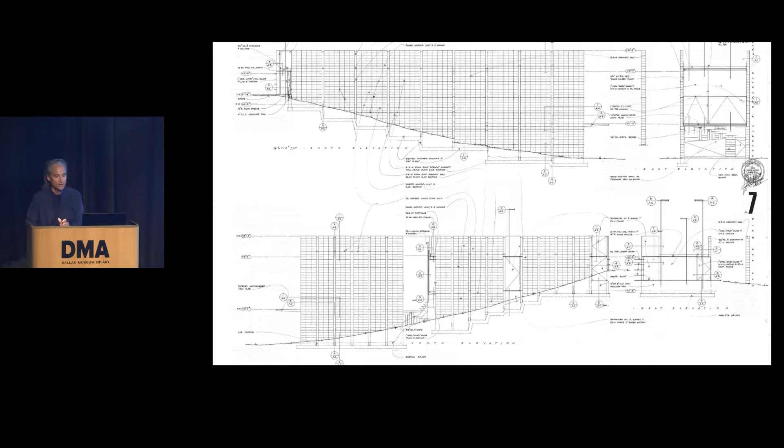I was the owner builder. I topped out the last wall with the grout pump and the hose in my hand. These are three generations of masons, the Hotstetlers, who had a side firm called Midnight Masonry. We did this nights and weekends with friends.

It was how I started my practice. It was my business card coming out of this hillside. It was on the cover of Architectural Record, was a Record House and Review, and featured in many other publications.

All the formwork for the house was recycled into the interior partitions. The block is as cast out of the mold, so it's reflective in oblique light, and it changes with the different times of day—sometimes it's silver, sometimes yellow in the morning, red in the evening. But it sits on the street. There's a street porch, and you drive into the house.

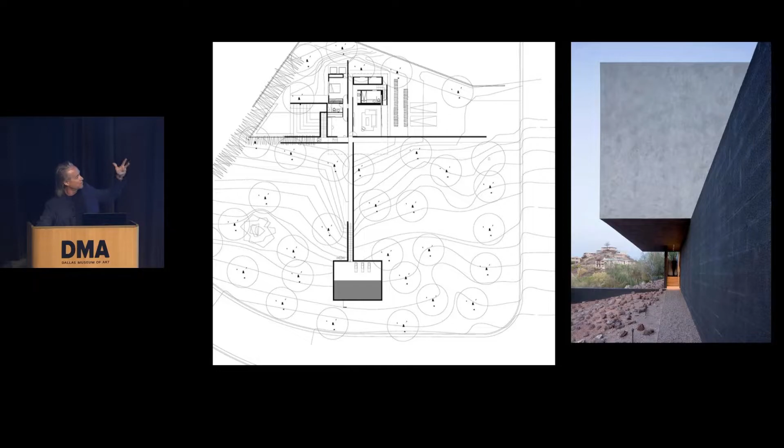You were just above the city skyline, so it almost looked like a real city skyline, kind of stacking up. The section was all about looking across the house, the house across the street, a pinwheel plan, masonry laterally supporting this floating volume, which is plastered with a finish that would change with different qualities of light—like the desert patina or desert varnish on rocks that would be black, brown, purple, silver in oblique light.

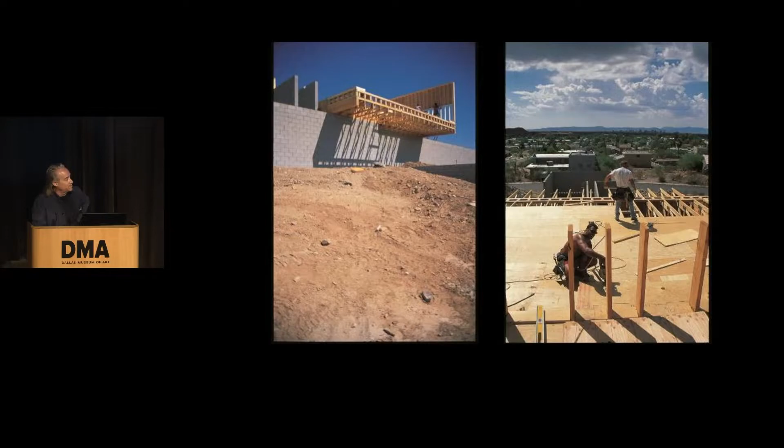First project on a very low budget—gang nail trusses, wood frame, stucco. But there was this big idea, this dialogue between the warmness of the interior of the living volume and a cool volume that was out here.

It's a tome, a 10-pound book, it comes with like a luggage rack carrier thing. Anyway, it's like 6 selected projects, but it's called Dialogues in Space, and it's really how I think about a site and a building—it's a method of how I work. So a lot of times the epiphanies in our studio are through dialogue.

I certainly sketch and all of that, but a lot of times it's about sitting around a table and talking about the intentions of a project. It's also a dialogue with the constructors, with the client, and it's about listening. It's a kind of methodology of how we work.

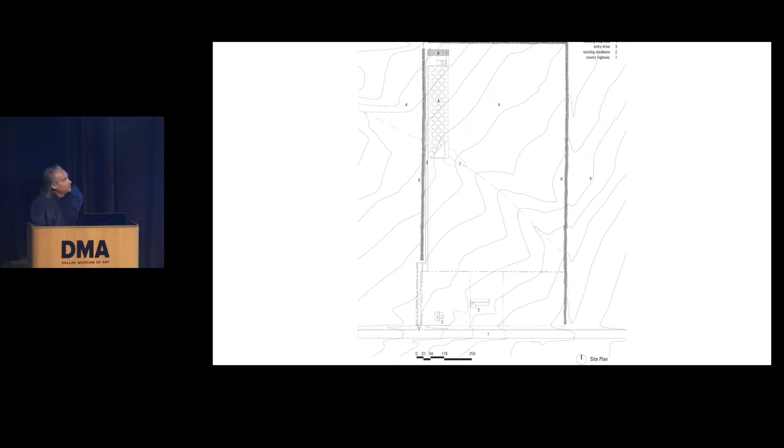We're against the hedgerows that protect us from the northeast winter winds. An apple orchard, which is kind of in memory of one of the last things my client did with his father.

Nothing fancy, and then clad in galvalume. It's actually reverse masonry veneer inside and concrete slabs to absorb the winter sun. But I love this kind of warm light of the home in this kind of glacial blue.

So back to the desert. We're way up here at the edge of our desert, edge of Scottsdale, desert courtyard house. These rocks were here, they had like fallen from space or something. They're the only volcanic rocks around. So we were like, okay, we're keeping those.

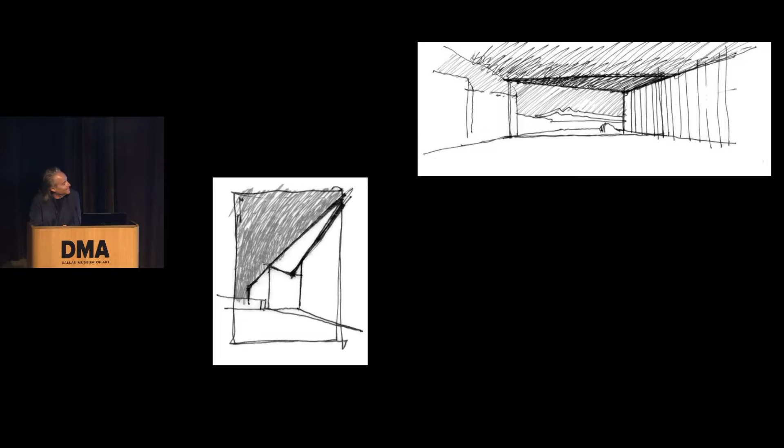Some early sketches by Tommy Suchart, who was just lecturing at UT Arlington. Tommy was the principal collaborator with me on this project. This is pretty much all he did when he was at my studio for like 6.5 years.

It was 10 years in construction. It was 2 years in design and construction documents. One reason is this long driveway. It was a site that was added late.

It's a peninsula surrounded on 3 sides by 2 major washes. And this is this roof, which is 5 by 10 Corten, that wraps down in places the courtyard in the middle to reduce the mass of the house from above.

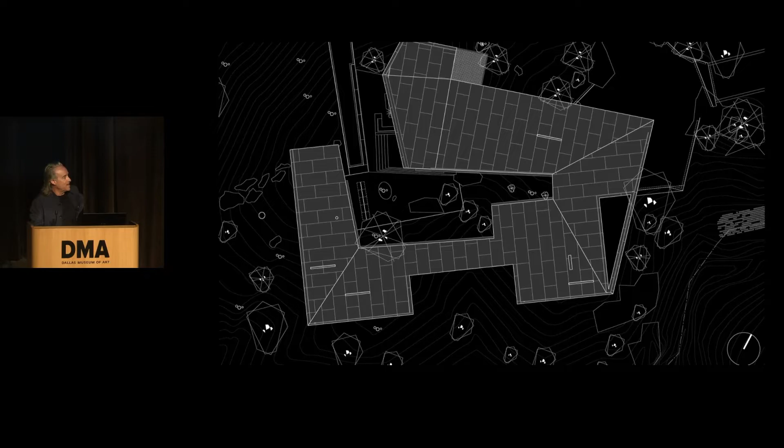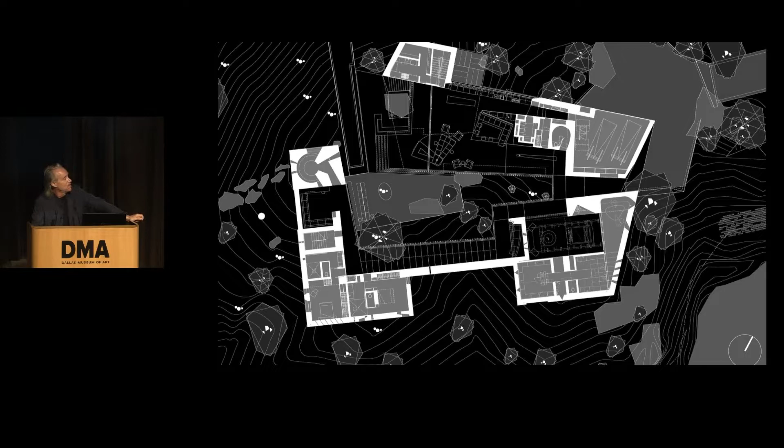This is the plan. It's a kind of engawa plan, so it's a loose collection of rooms around this, in this case, a glazed veranda, and then certain volumes that are in the base of the house section.

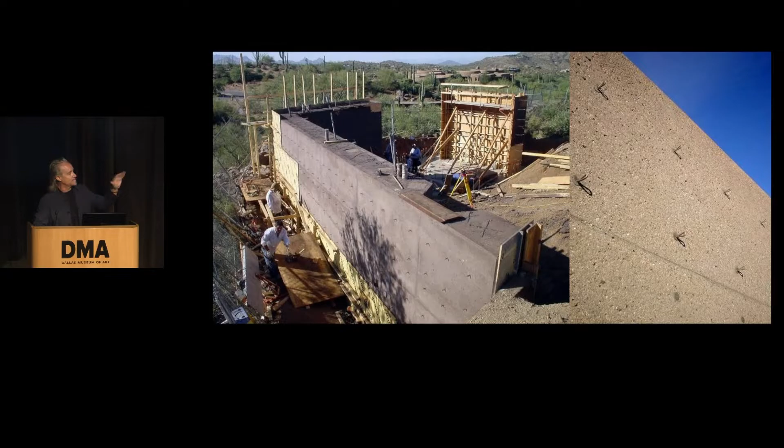The base of the house is a concrete plinth that is battered 3.5 degrees and then blasted, and it's the same concrete as this. So it's the same concrete slab that we're working differently.

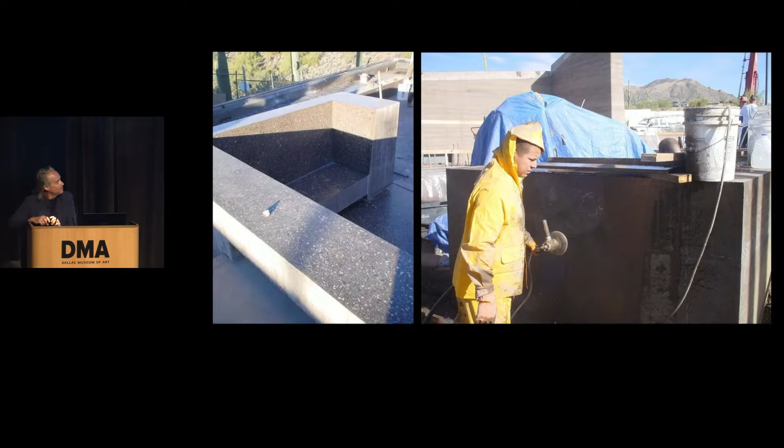So on the outsides, we're sandblasting. Everywhere else, we're grinding it with terrazzo grinders, large grinders and small handheld grinders. This is the fire pit, and then sometimes we're actually carving into the stair with a giant concrete saw and then polishing.

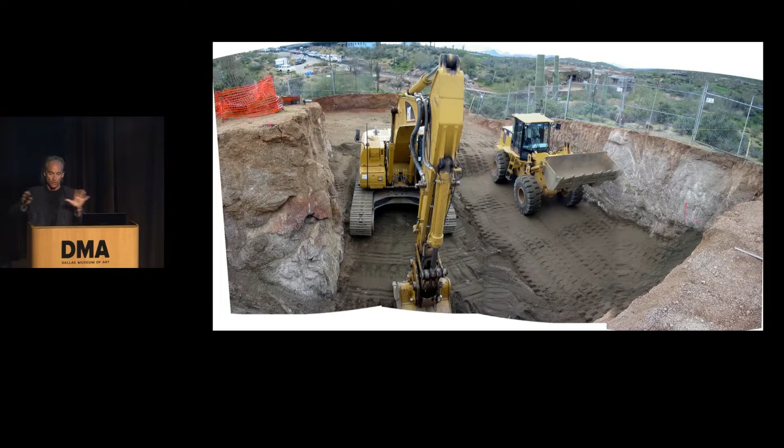And on top of that really good foot, which is necessary for rammed earth, is all of the excavation. It was very good soil for rammed earth. Not all soil is - we tested it, it was perfect. And we got really fantastic rammed earth walls, but literally there was no import, no export of earth. It all went into the walls.

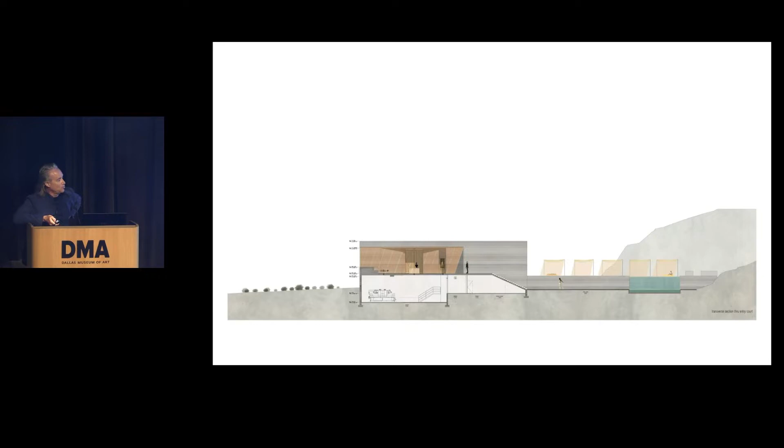So this is that 170-foot cliff. You walk up a stair. This is the artwork that is constantly changing at the top of the stair, the lobby.

This is a camera, so as you move, it's all outdoor circulation. You're never in an air-conditioned volume. You're walking to your room, going in between the privacy of your room, which is all about the quintessential desert experience, which is a solitary one. And yet we had to break those bars and hinge them, and that became a camera.

So as you're walking across here, you're panning the landscape. Kind of Western movies that were filmed here and other things are in the project.

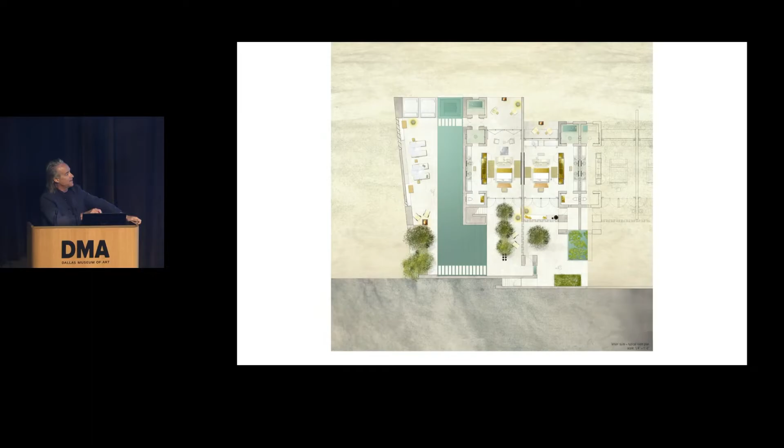The smell of water, the sound of dripping water, your number. We couldn't afford the gates into the courtyard, so they became woven horsehair from the Spanish tradition of doing that, a do-not-disturb rope.

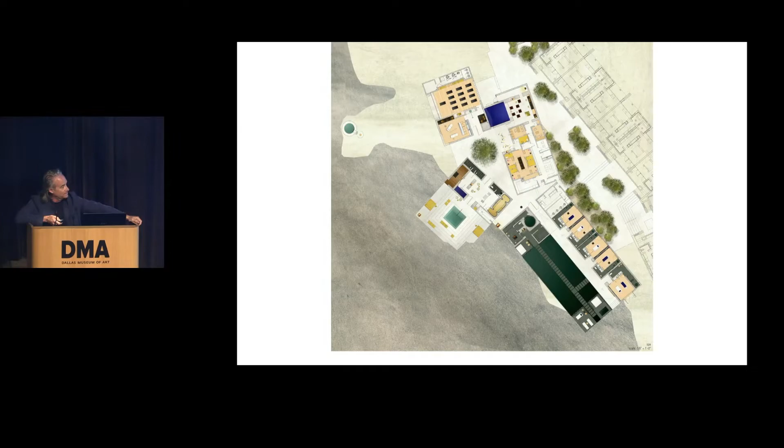And it was, the landscape—they're in the landscape, sheep herders all day, and their hogans were very introspective: family, fire, food, and a hole to the sky. So, anyway, these are the ways we were thinking about this project, and it kind of just completely recedes into the landscape.

And so we've done other resorts. I'm going to really breeze through these very quickly. This is with Marwan Al-Sayed. We sometimes collaborate. Marwan's doing a really fantastic project here in Dallas right now. It's under construction. I went to see it yesterday morning.

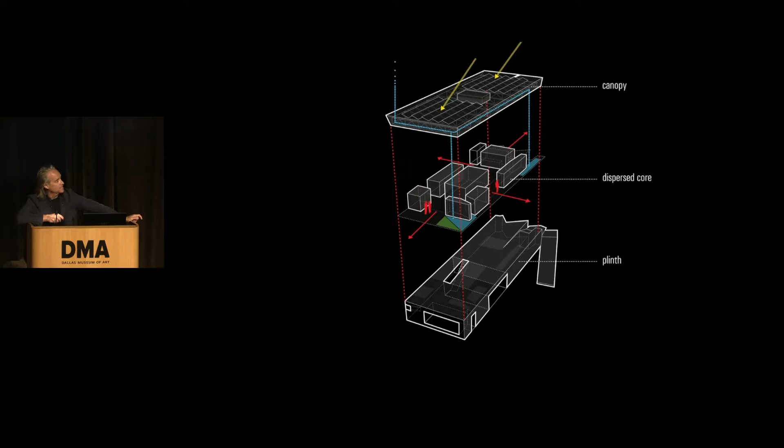and the plinth. And so this is that plan. All the doors open into those dispersed core volumes, so you can open up the entire house, and it's like living outside in fully shaded, fully programmed space.

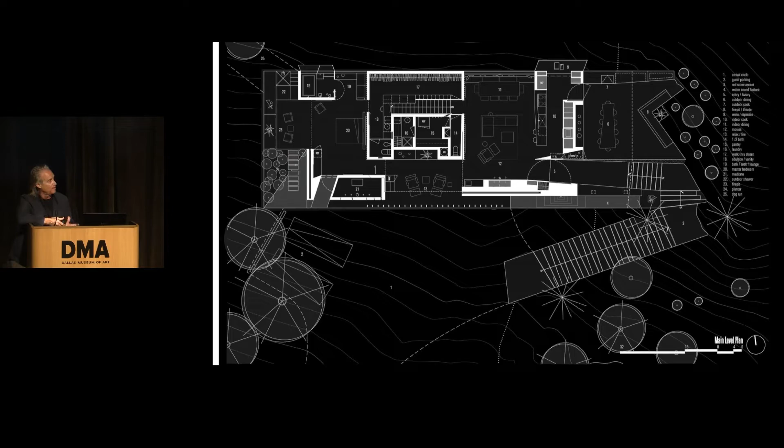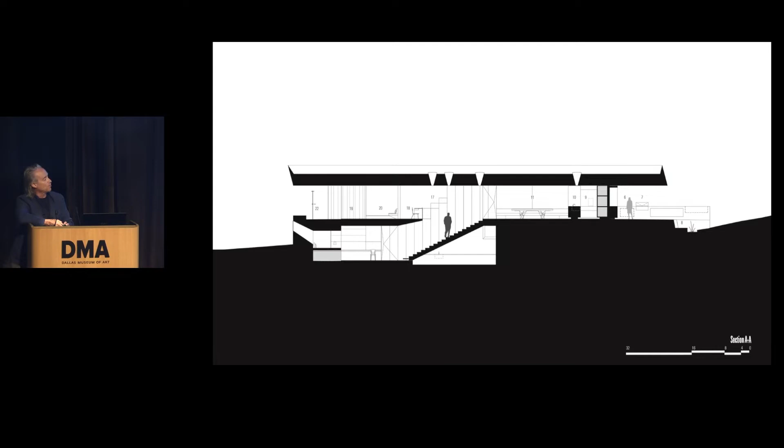It's 4,500 square feet, 2,000 square feet is outdoor space, fully programmed, 2,500 conditioned. So this is that house, the stair from the garage, and the 2 bedrooms that are kind of workout and a study.

Section the other way. Some details. It's actually masonry and concrete, some slab on grade, some concrete topping on metal deck, all clad in this kind of Verata plaster. It actually was, it's more monolithic than the concrete that we actually thought we could afford and found out we couldn't.

The entry, looking out from the entry. The roof canopy kind of splits as a kind of gift to the entry. There's an aviary. The first 30 minutes with this client programming was talking about their pets, their birds, their koi, their Rhodesian ridgebacks, and their cat.

Fabric ceiling inside and out, so you kind of see the hint of the Gang-Nail trusses above. It's also very good acoustics. This is one of the ridgebacks.

The mill finish steel. All the finishes inside on the main level are all dark finishes. It's about living in a shadow with these kind of framed views to the landscape, and it's actually very comfortable to be in a darker space in the desert and look out to that light.

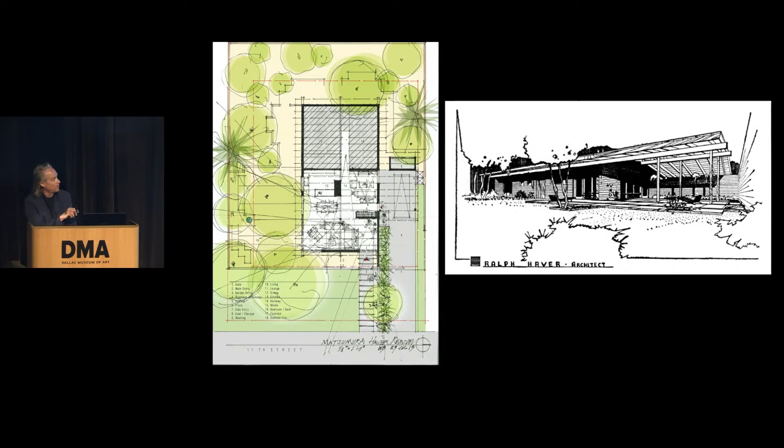We got a contractor to give us a price off of this sketch so we could know how much we could really do. This had been filled in. We found the original model through research, found this couple, Bob and Helen Winkle, that owned the original model. The reason we had to do that is it was a real hack job on the street.

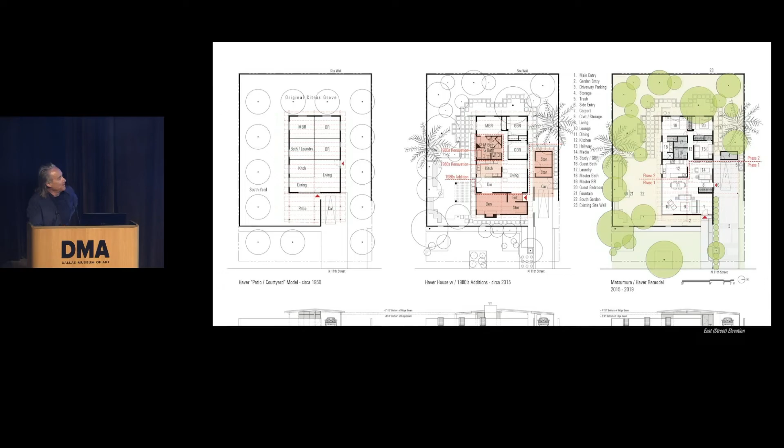This is going to hurt everyone's eyes, I think, in the context of this presentation. But the light doesn't work, nothing works, the plan doesn't make sense. So anyway, we researched there were 4 models in this neighborhood. Some of it we just left alone. There was kind of new paint, the framing's a subtle color different than the masonry.

Masonry, almost everything in the 50s and 60s, 80% of all things built in Phoenix were masonry. And so, typical thing, masonry, 4/8/16, concrete floor, carpet was an option. It's such a humble house.

We put something of ourselves into this, but the goal was not to know. We actually contemplated reducing the square footage to the original square footage, but that didn't make sense. So how could we keep that original, expanded square footage?

Anyway, this is how it feels now. My longtime photographer walked in here and he goes, 'This is just enough.' It's 1,300 square feet. This is 6'8". This is 8'6". So they're these low tent forms. It's gorgeous. I'm so proud of this project.

I love history. I love respecting the history of a site, history of anything that I'm given the opportunity to work on.

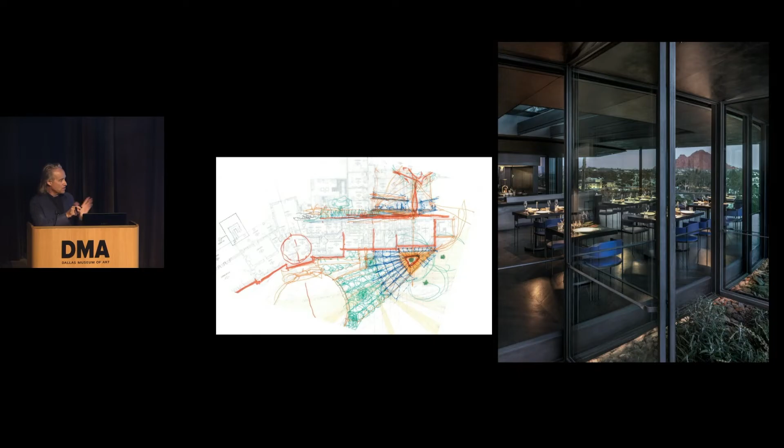It's kind of this rotunda, the head of the house, and these open arms that are on a slight radial. We worked with that, created a new wedding venue here. It started as a restaurant, and then it grew into new wayfinding graphics, a new drive, creating a new wedding venue. We actually got this through historic preservation, it was a slam dunk, had to go through the HOAs, all this.

Because they understood that all historic preservation is based on the Venice Charter, which says that you do not imitate history, because then you dilute the very thing that you're trying to preserve.

So our concept here was very simple, to recede by day as a shadow under this historic eucalyptus grove. And then the interior is all dark finishes so that who you're with, your food, and the Wrigley Mansion — relit correctly for the first time in its history — and then the valley floor view as the star, and the architecture recedes.

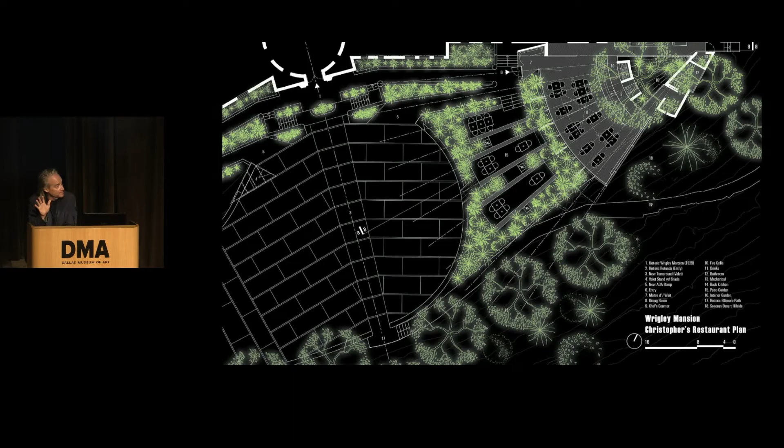So a section, daytime shot. This is the entry, which is these faceted glass planes in Graylite II, used to be called Graylite 14. Some has mirror behind it, some has a translucent film. It's kind of always reflecting the city.

This is a painting by the widow of Yves Klein, who happens to live in Phoenix and is a friend of both the chef and I. We did all the interiors, custom tables, the services in the tables, customized living Divani-era chairs with a back. So the entry is right there.

This is the space in the day. It's really an evening restaurant only. Usually the shades are down all day, and the shades across this skylight stay down until service.

The chef drew these for the plates. He loves cartoons. There's a little surprise under that lamp if you go here for dinner—just mention the service is in the table.

The roof opens, similar to a French restaurant that he cut his teeth in Paris, where he was there illegally. He came from Phoenix as an Arizona native.

Some views of the courtyard where the eucalyptus is, and back to the prep kitchen, a service bar.

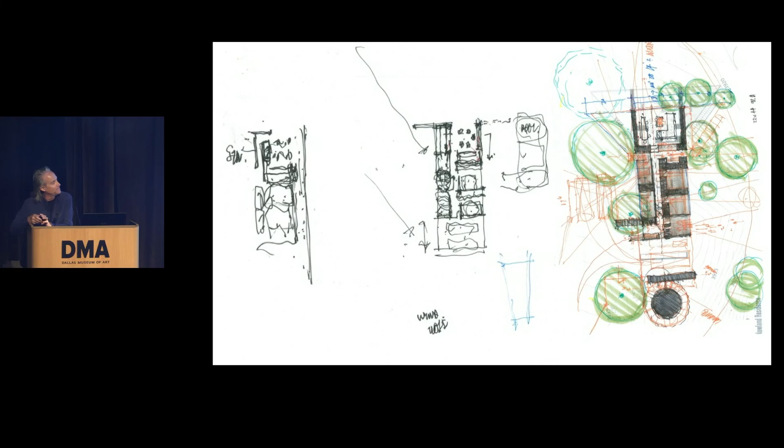So this is that plan. It's about 1,100 square feet conditioned on the top, and a kind of basement activity room.

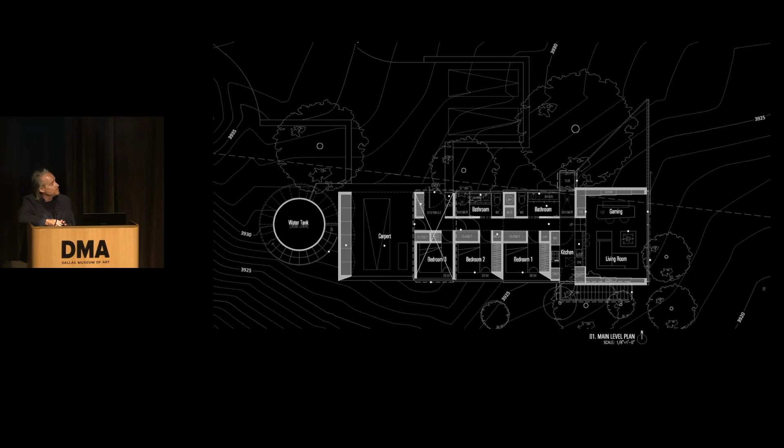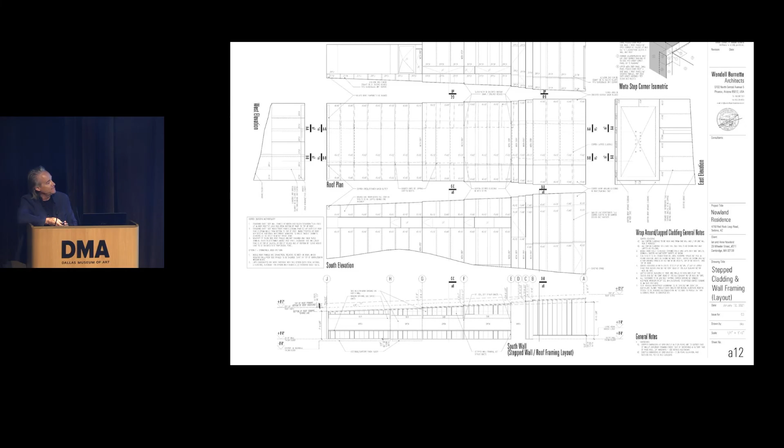It's a Carlisle high temp 300 product that the corten's fixing goes on. This is how it's going to appear.

The interior finishes are all dark finishes again. The floor, the walls, and the ceiling are a wrap that steps up and out to that view, both planimetrically and sectionally.

Something I've always wanted to do is have the window of the room open entirely into this empty frame that you see on Red Rock Loop Road on the way to Red Rock State Park—it's kind of like an abandoned cinema for a moment.